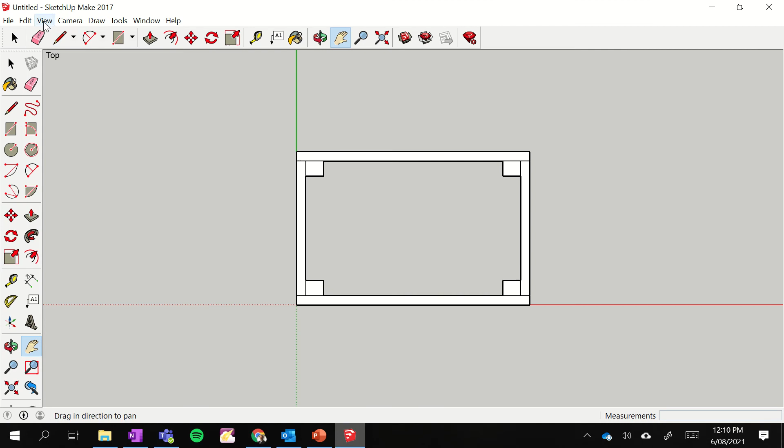If we have a look at the front view, we've got all that, and you can see that we've got that view.

Normally, these are called orthogonal drawings. Normally they'd have what's known as hidden detail lines, dashed lines to show you where the pillars are running and where the bases are and things like that. But we haven't got those in this one.

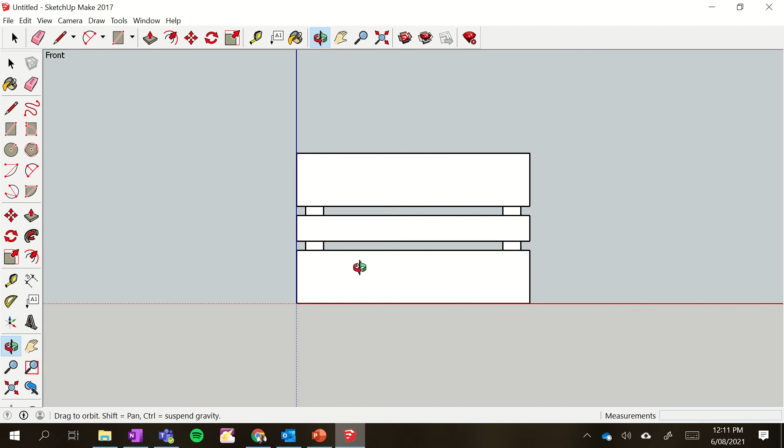That's okay, we will put them in, and we'll put this base in there, and you'll start to understand what it looks like. So we have to work from the bottom. Let's flip this around.

I'm just going to rotate it to this point so that I can see what I'm doing. What I aim to do is put a base over the top of this and fix it up. It's going to be a bit fiddly, but we should be okay.

So we start with a rectangle, and we know that it's going to be 67. There you go, I've already got to fix this up. Let's zoom in a bit. Yep, that's better. We start with this point here, and we're going to go across here like this.

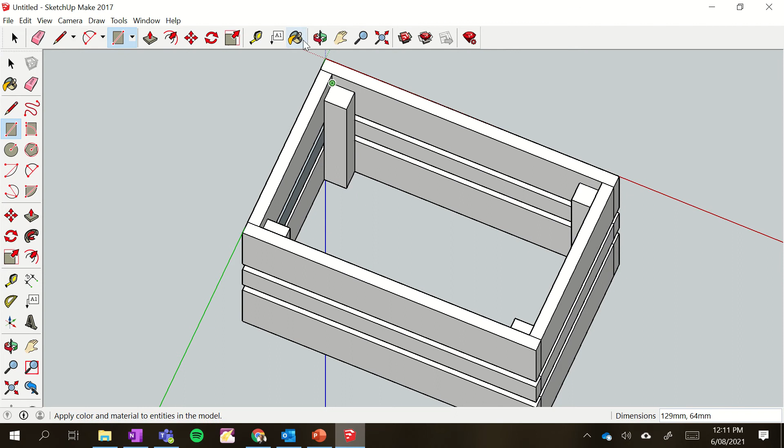I still can't see everything that I need to do, which is fiddly, I know. We'll start with here, and we'll start going there. So if I do that, you see that my dimensions are 23 by 19.

So what our dimensions are is, because this is inside it, and this piece here is 300 mils, and these two pieces over here are 12 mil thick, we have to take off 12 plus 12, which is 24, off 300, which is 276, and it's 67 millimeters wide.

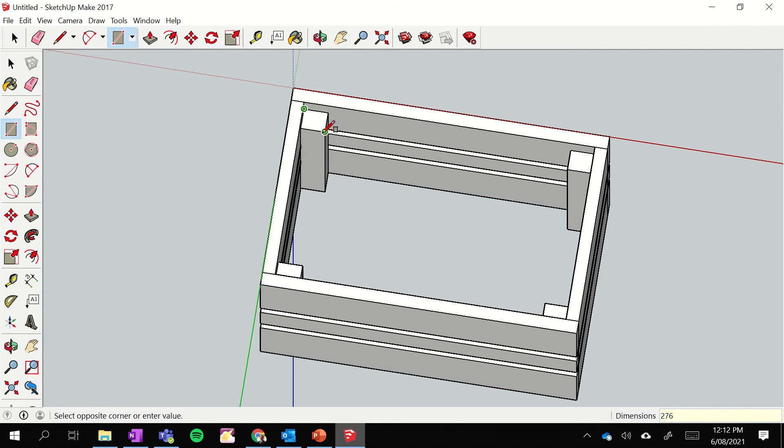67 millimeters wide. So I'm typing 276, comma 67, and if I hit enter, I get that piece of timber there, right?

Now, you'll notice also that we end up with the pillar showing through the base. And watch what happens if I delete this. If I click that line, press delete, and if I click, you'll already notice what happens. My pillar becomes hollow. So I don't want that.

What I want to do is undo that erase, and I'm just going to use the push-pull tool and bring this piece up to 12 millimeters. 1, 2, brought that up 12 millimeters, and it's got that hollow piece of the pillar. So I'll fill that in. I just go like this.

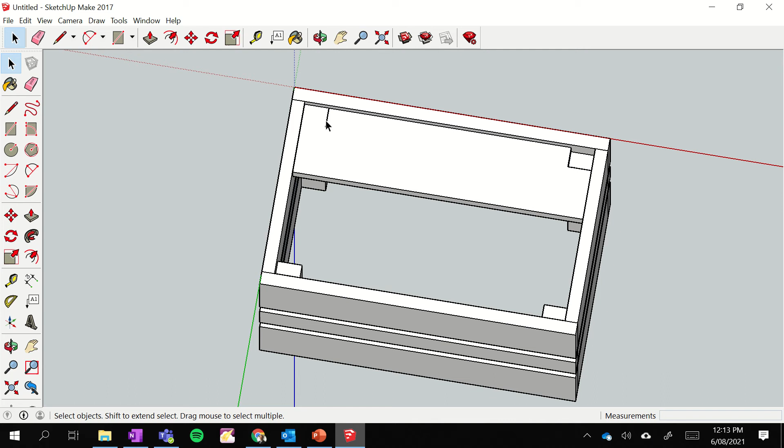I'll go like this, it's a lot easier. From this endpoint across to here, like that, and I fill that piece in. Then I can delete that line out of there, and it won't delete or make my pillar hollow or my piece of timber hollow either. So I rotate this around, and I'll do the same thing to this one.

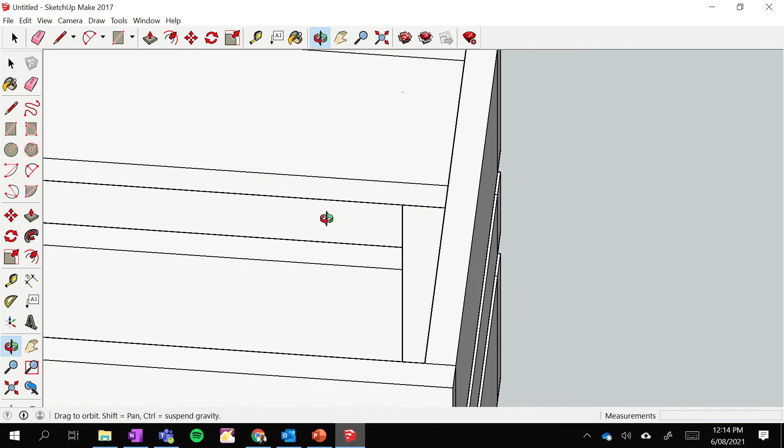Do the same thing here, where I start at this endpoint, go across to this endpoint, and fill that in. Then I can delete that, and delete that, and now I have the start of my base.

Now what I can do is move this so I'm working on the next one, which is over here. Bit fiddly, I know, but that's the best way to do it. If anyone suggests a better way, maybe they can, but I'm going to do it that way. So my next piece is going to go in here.

You can see there, I've got 23 by 19. Now I know that piece is 23 by 19, but what I need is 276, because that's 12 plus 12, which is 24. It's 300 minus 24, which is 276, comma 67. I hope that doesn't confuse everyone, but that's just the way you do it. I've got that piece in there now.

It fits in there snug. I use the push-pull tool to bring it up, a 12 millimeter thick piece of wood. And then I'm going to move this so I can see it a bit better.

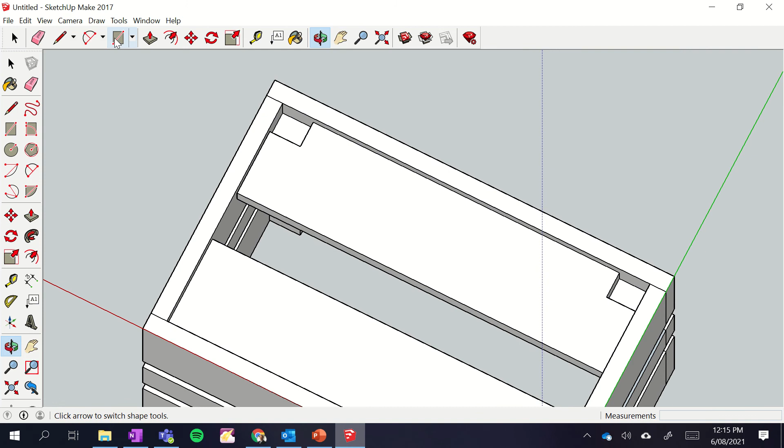I then have to fill that little gap or void in there. So I'm going to go across here like this, and that fills that one in. I can delete those lines, just these ones here. I don't tend to use the erase tool, I prefer to use delete on my keyboard. There is an erase tool, but sometimes it can be a bit fiddly and cumbersome because SketchUp doesn't quite know what you want to do.

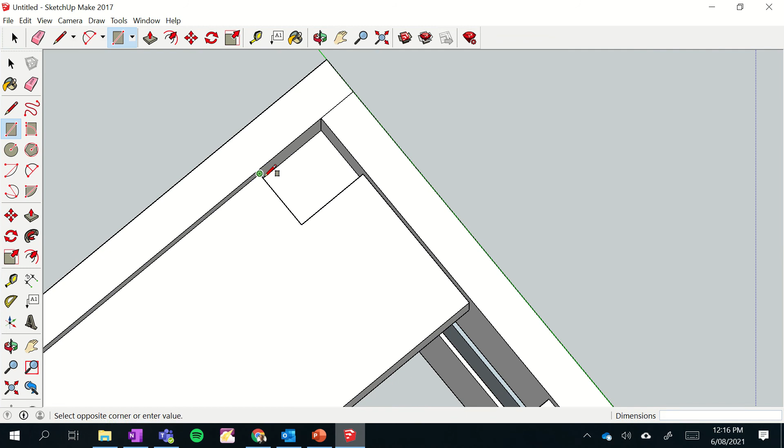Let's zoom in on this. I'm just simply scrolling with my mouse to be able to zoom in. I click the midpoint and midpoint like that, and then of course I hit delete, and I hit delete, and there we have our completed piece.

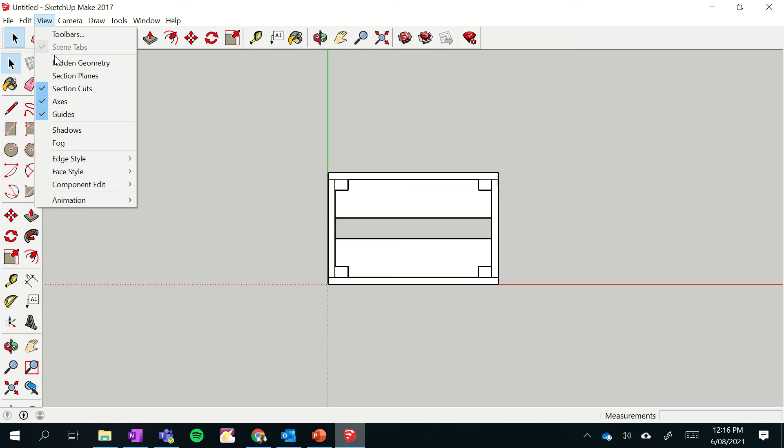Let's have a look, let's spin it around. We'll go to the ISO view and zoom out. Oh, it's upside down now. View, standard views, top view, and then view... sorry, camera, standard views, ISO. I've said that about 3 or 4 times. And there we have our box, our crate, completed.

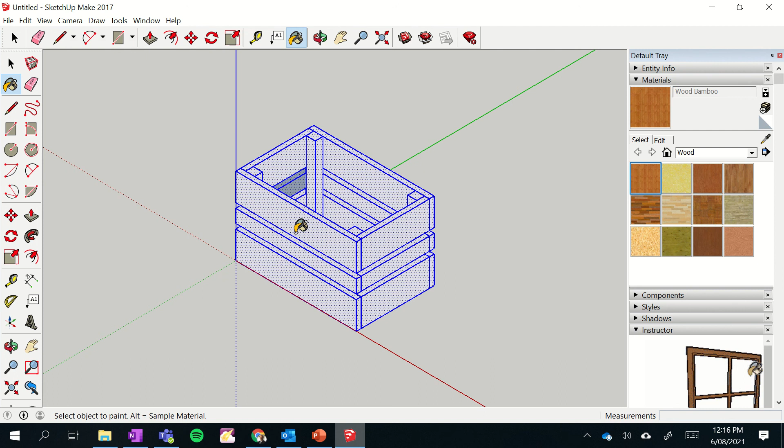Now the next thing to do, of course, is use the paint bucket tool and get these items up here. If you choose timber, watch what happens if you select all of it. I just press Control plus A, and it selects all. If I hit that, then my box is now timber, except for that piece there, that's the one that played up, remember, in the previous tutorial. I'll just make sure, oh yep, it's all timber.

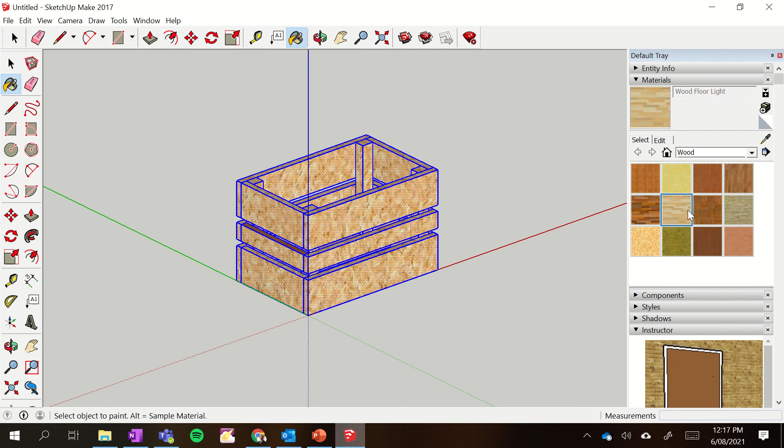You can use whatever material you want. This one's bamboo, you might want to use cork, particle board, light flooring, or bamboo, whatever you like. I think timber is the best way to go with this one.

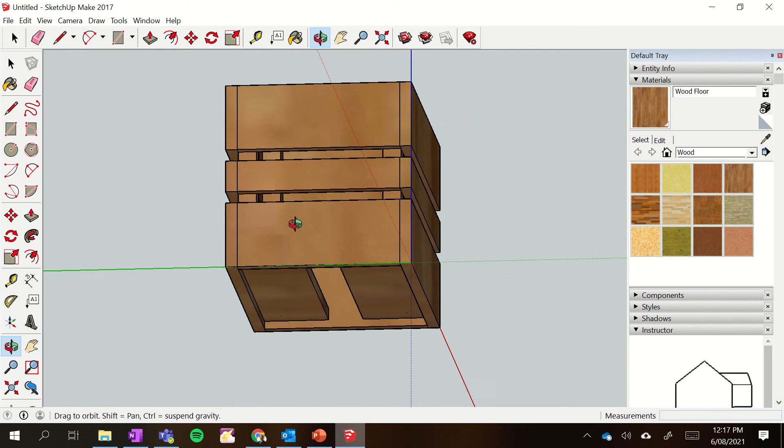Then all you have to do is say select none. So Control A selects all, Control T selects none, and there you have it. You have your timber 3D box with its base in there already. Looks mighty cool if you ask me.

And of course you can see that because that other piece doesn't like being selected, it's now a different material, so we can go back and fix that one like that. I think the base of it also is a funny color as well, not funny, just a different color to what it is. And there you have it.

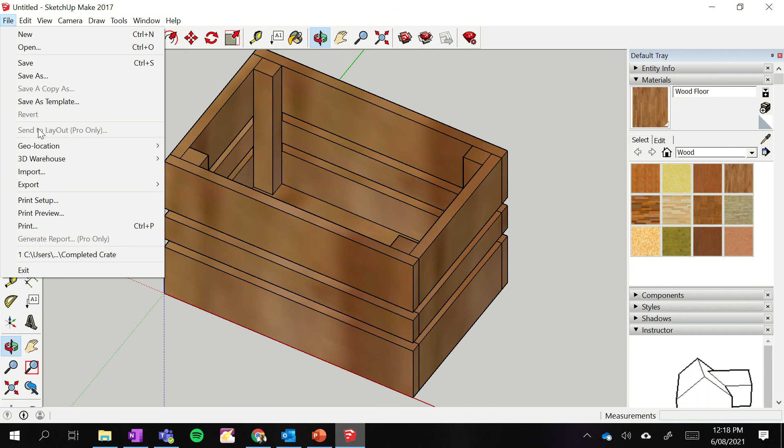There's your 3D box. Now you can do this to that. You can obviously save it, but you can also export it as a 2D graphic.

And you might want to change it to a JPEG and call it your name and timber crate. Then you can pop that, let's export that, then you can pop that onto this one here if you'd like, so then you can show me your completed crate.